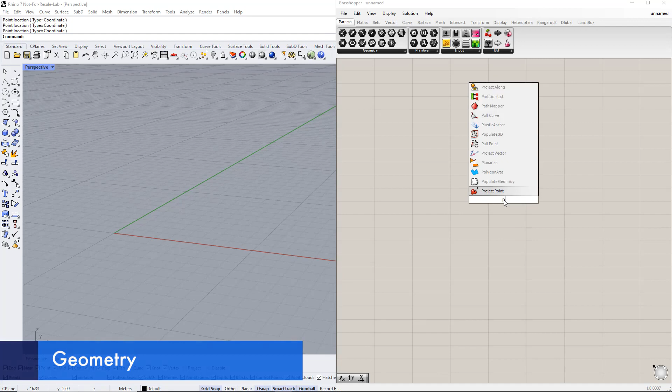We start with the geometry. We create a point by double-clicking the canvas and writing point. As we mentioned in the previous video, this point is orange. That means it does not contain any data. We can insert data in this command by right-clicking the command and selecting Set One Point. Then we set a point in Rhino. The coordinates are 0, 0, 0.

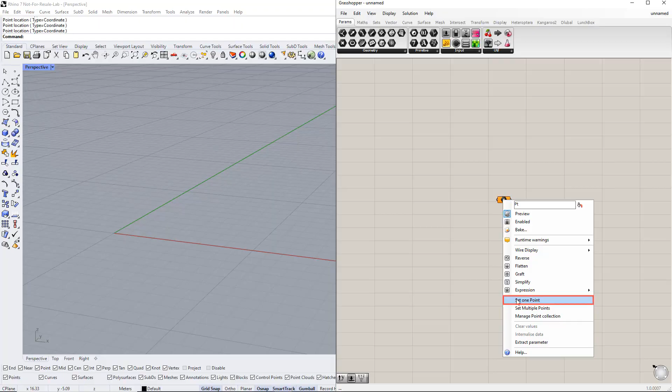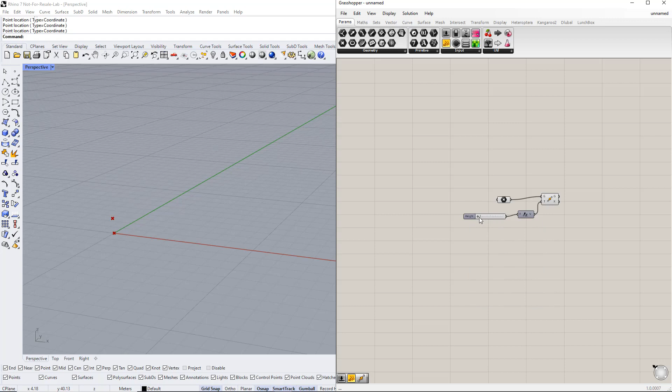Next, we copy this point in the Z direction using the Move component. After inserting the unit vector parallel to the Z-axis, we need to set up a range, for example, from 1 to 10. Then we enter height for this slider name. Afterwards, we create a line between these points using the line component.

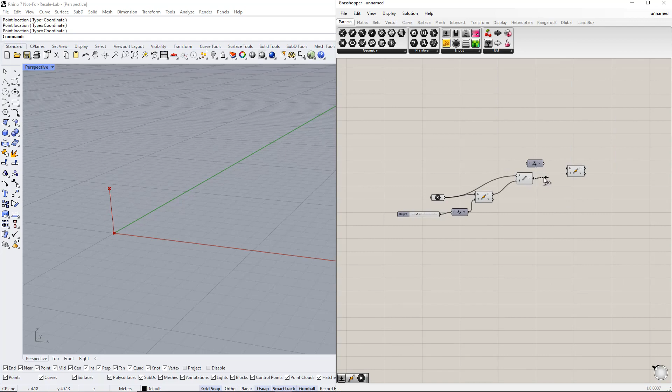In the next step, we copy the line as well as the points in the X direction. To do that, we insert the move and the unit vector parallel to the X-axis components. We also need to create a new range, for example, between 1 and 15. Then we enter length for this slider name. We repeat this for the points, as you can see.

Now we copy all the lines and points in the Y direction using the Move component. We also need to insert the unit vector parallel to the Y-axis. Then we set up a new range, for example, from 1 to 10. Then we enter width for the slider name.

After that, we create lines in the longitudinal direction. First, we need to determine which points will be connected to each other. Then we connect these points to each other using the line component, as you can see.

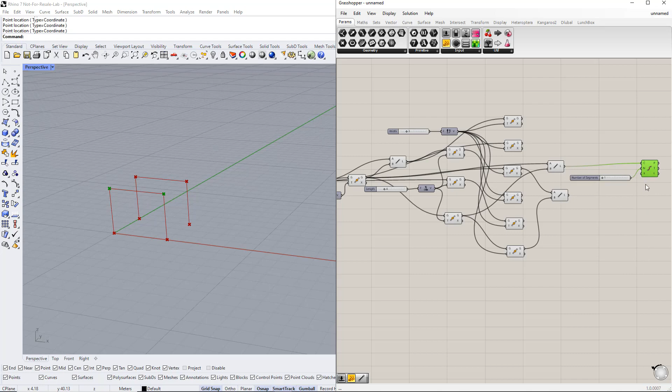Now, we divide these lines into equal segments using the divide curve component. By default, the value of the segment number is 10. We set up a new range, for example, from 1 to 15. Then we enter number of segments for this slider name. Afterwards, we connect these points to each other using the line component.

In the next step, we create lines for struts. To do this, we need to copy the 2 points that are parallel to the Y-axis in the X direction using the Move component. We also insert the unit vector parallel to the X-axis. After that, we set up a new range, for example, from 0 to 5. We enter distance for this slider name.

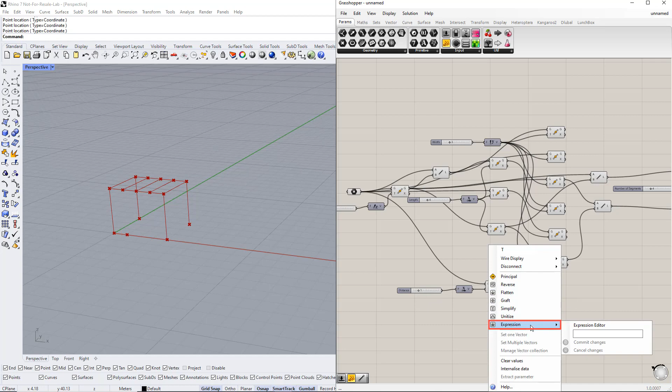As you can see, we need to reverse the direction. We can do this by right-clicking the motion and selecting the expression. Then we enter -X and click Commit Changes. We repeat this for the second point. Afterwards, we create lines for the corresponding points using the line component.

Next we create the diagonals. We need to determine which points will be connected to each other. After that, we connect these points to each other using the line component. We can copy any line using the line command, as you can see.

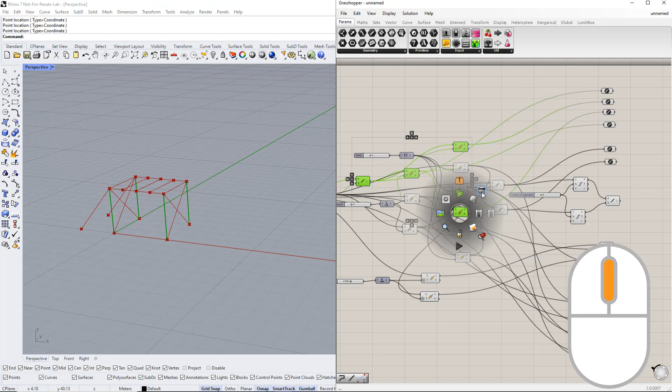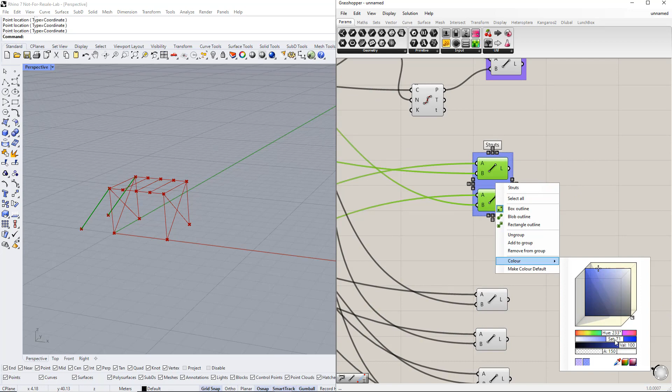Now we hide these lines by clicking the mouse wheel and selecting Disable Preview. Then we make groups, enter names, and change the colors. Next, we put all the number slider commands together in a group to control all the parameters easily. Then we enter parameters for this group name.

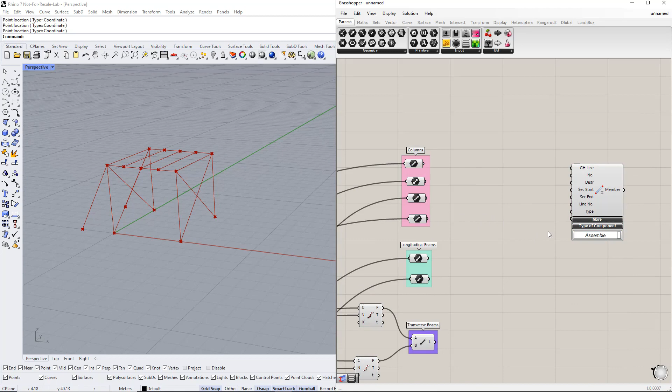Now we assign members to these lines. We can do this by double-clicking the canvas and writing member. We begin with the columns. For this member type, we select the beam type using the value list command. Now we connect all the lines to the Grasshopper line in the member component.

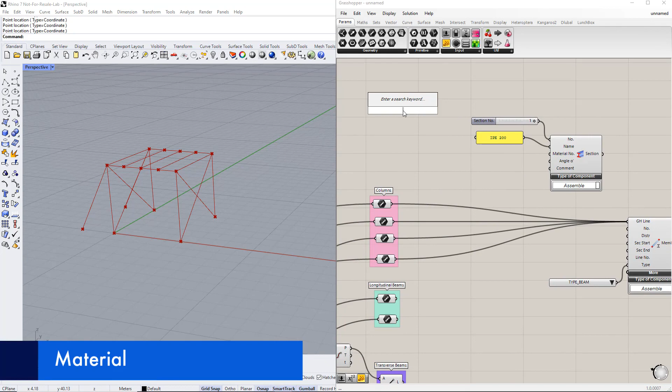In the next step, we define cross-section by double-clicking the canvas and writing section. Then we enter number 1 for the cross-section number and IPE 200 for the section name. Afterwards, we define the material by double-clicking the canvas and writing material. After that, we enter number 1 for the material number and S235 for the material name.

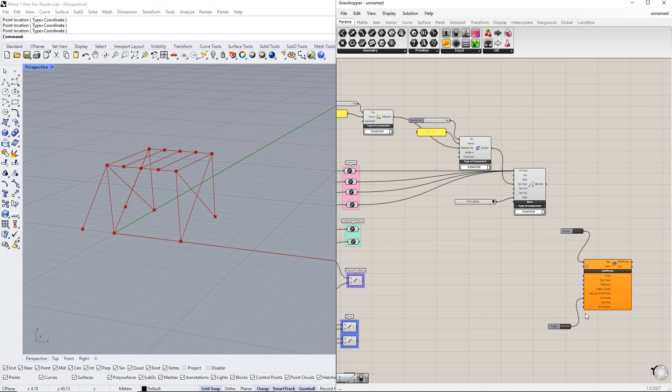Next we transfer this model data to RFEM 6. We have to insert the Dlubal component, RFEM 6 export component, by double-clicking the canvas, then writing export. To start the export, we use the button command. We will overwrite the previous data in RFEM by using the Boolean toggle command and switching it to true. To perform the export, we double-click the button command.

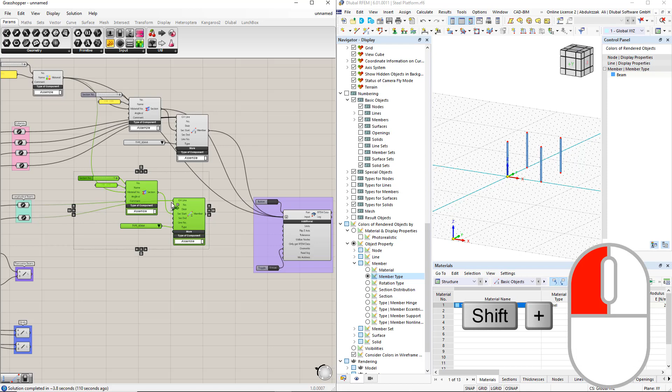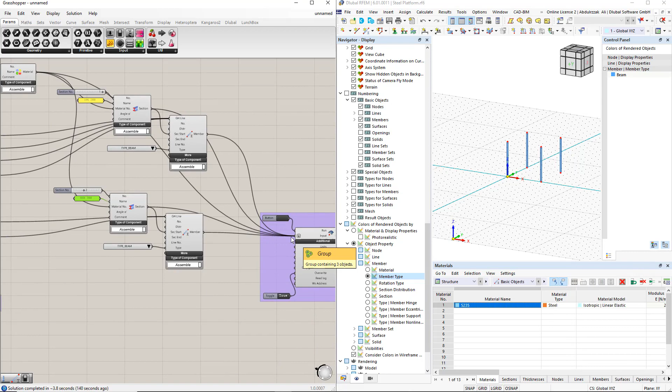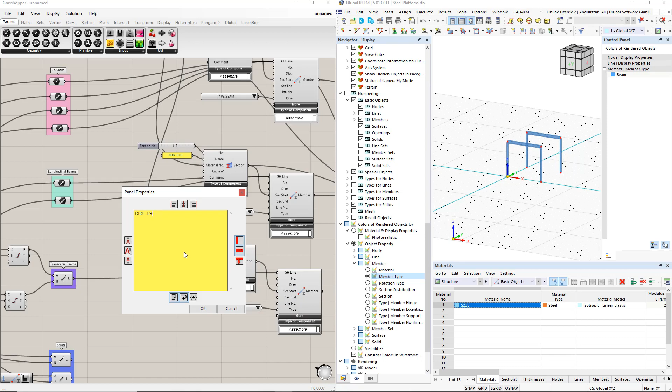For the longitudinal beams, we assign another cross-section. Therefore, we copy both the member and section components. Now we have to change the cross-section number to 2 and the cross-section name to HEB 300. We repeat this for transverse beams. Here, we have to change the cross-section number to 3, the cross-section name to CHS 193.7 × 5, and the member type to truss.

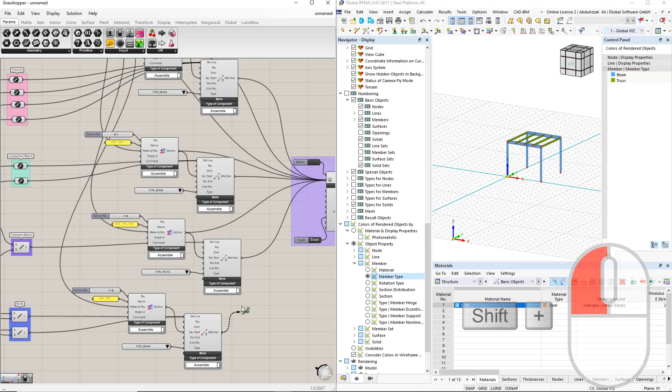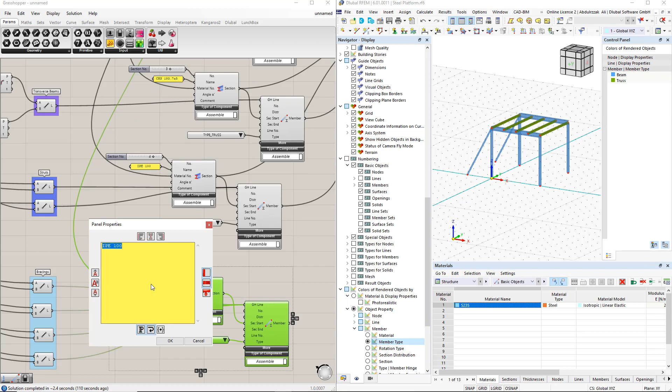For the struts, we have to change the cross-section number to 4 and the cross-section name to IPE 100. We repeat this for the bracings. We also have to change the cross-section number to 5, the cross-section name to R20, and the member type to tension.

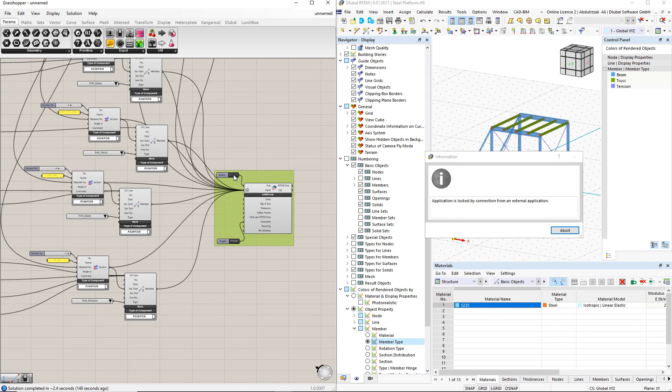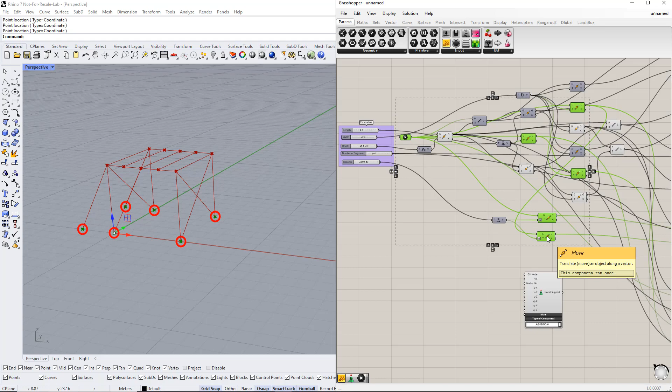In the next step, we will assign supports. To do this, we double-click the canvas and write nodal support. We also need to determine these nodes and connect them to the Grasshopper nodes in the nodal support component. Now, we would like to assign hinge supports using the panel command. Then we connect this panel to the support conditions in the nodal support component.